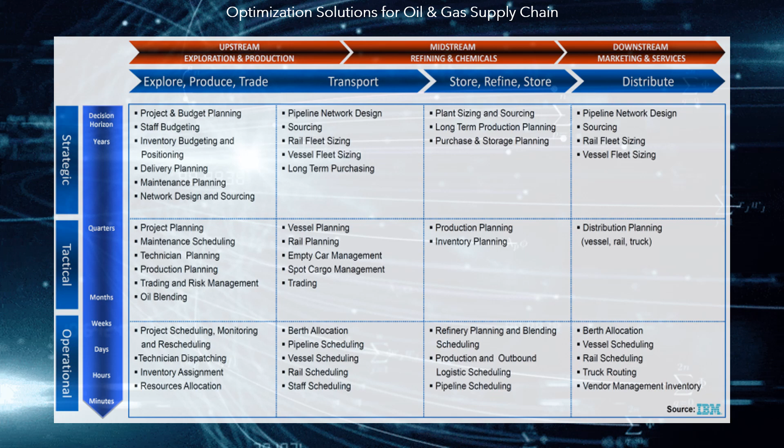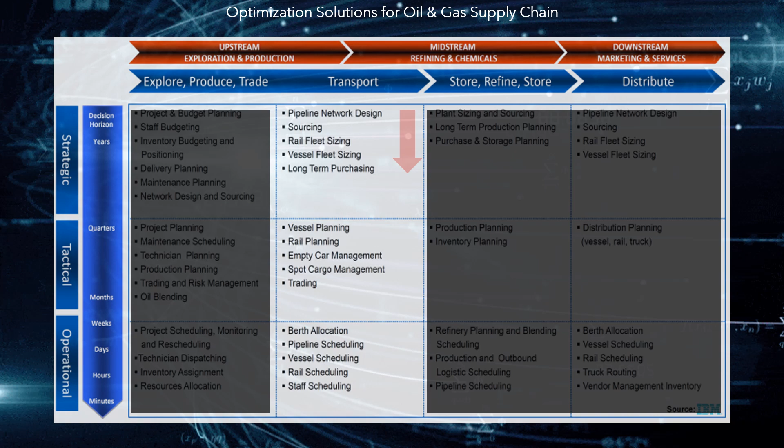Oil Supply Chain Optimization: the oil and gas supply chain is made up of 4 links: upstream, midstream, downstream and retail. The links are connected by multimodal transport networks. The table, elaborated by IBM, shows a resume of the optimization solutions for oil and gas enterprises. Optimization solutions in the transport chain of petroleum products can be classified by their hierarchy: strategic, tactical, and operating. Several of these applications will be discussed below.

Oil Enterprise-Wide Optimization integrates mathematical models for each of the links in the oil supply chain, in such a way to manage the planning of the supply chain with a holistic vision. The design of HAI-OIL-EWO was the result of work done for a multi-business oil company. The union of models, and their coordination, forms the hypothalamus of an oil enterprise.

The current computational power allows detailed modeling of the supply chain, considering individually all the systems that compose it. This allows visualization of all the existing bottlenecks that affect the maximization of economic gains. All models developed by HAI to support decisions in the oil industry are interconnected through an information system. In this way, the construction of the artificial hypothalamus is a question of joining the equations that make up the different models.

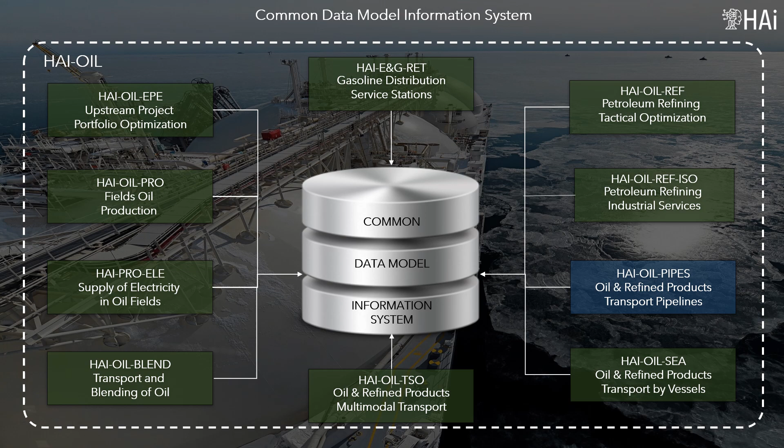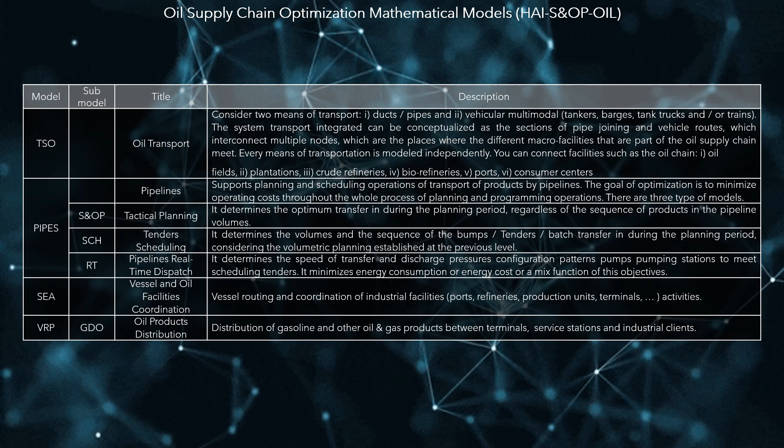Oil Transport Systems Optimization corresponds to a general model, common to all types of oil products: raw, refined, natural gas and biomass, which represents the process for a specific system, including particular equations when required. It considers 2 types of transport modes: pipes and multimodal vehicles, like vessels, barges, train tanks, and/or truck tanks. The table presents a summary of the mathematical models developed by HAI for oil and gas transport optimization.

Pipelines planning and scheduling: the problem of optimization of pipelines involves safe, reliable and economical operation, in which, for each moment of the planning period, the flows, pressures and configurations of the pumping stations must be determined, according to the different types of products that must be transported through the pipeline network.

The goal of the operation moves between 2 criteria: minimize energy consumption, an environmental criterion important to preserve the sustainability of the planet; and minimize the cost of energy, an economic criterion important in energy markets where rates change throughout the day. On the other hand, the technical operating conditions, hydraulic conditions along the pipelines and at the pumping stations, must be respected regarding the flow of multiple, different products that must flow through a network of pipelines that involves the synchronization of multiple sections connecting several production fields, refineries, and ports.

The planning and scheduling of transport operations of products through pipelines, oil and refined products pipelines, aqueducts, gas ducts, and mineral pipelines, is done using 3 coordinated models.

Sales and Operations Planning, S&OP, determines the total optimal volumes transferred during the planning periods, regardless of the sequence of products in the pipeline. Scheduling Operations, SCH, determines the volumes and the sequence of batches to transfer during the planning period, whereas the volumetric planning is established in the previous model.

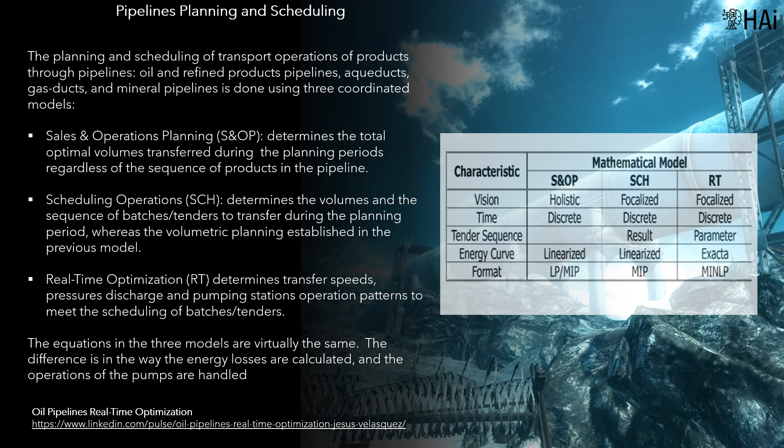Real-Time Optimization, RT, determines transfer speeds, discharge pressures, and pumping station operation patterns, to meet the scheduling of tenders. The equations in the 3 models are virtually the same. The difference is in the way the energy losses are calculated, and the operations of the pumps are handled.

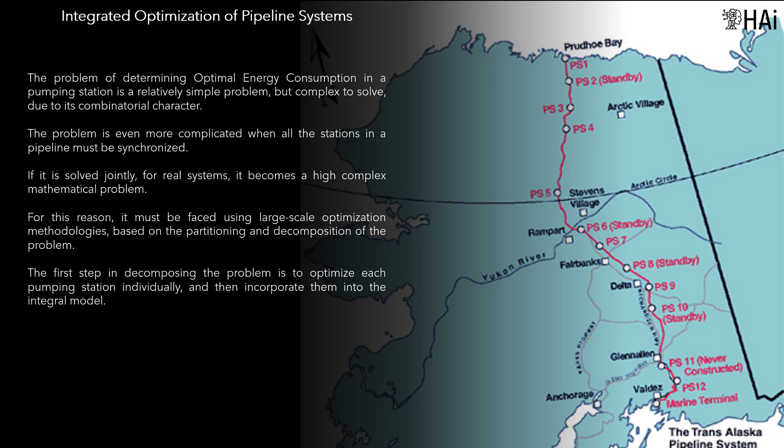The integrated optimization of pipeline systems requires that all the pumping stations be considered jointly. For real systems, it becomes a highly complex mathematical problem. For this reason, it must be faced using large-scale optimization methodologies, based on the partitioning and decomposition of the problem. The transportation system has two fundamental components: the pipeline system and the pumping stations.

The real-time models include non-linear modeling that determines the amount of energy consumed based on the flow of products in the system. In aggregated models, when multiple types of products can be transported in the pipeline, the total transport time must be divided into the time used to transport each type of product at different transfer rates.

To represent the flow of energy through the transport system, the following constraints should be considered: energy conservation in the ducts and nodes of the system; minimum pressure limits, or compression, at the outlet of the ducts, and maximum pressure, or compression, at the input to the ducts, depending on the type of connection between the operational area, node, and the duct.

In the real-time model, a detailed hydraulic system is available in the pump operation model, for each type of pump in the pumping system, and each link in the pipeline, for each type of product, or crude. This ensures the feasibility of the results.

Drag reduction is a physical phenomenon that causes friction to be reduced, and fluid flow to be increased. Chemicals that reduce drag are known as drag-reducing agents, DRA. Several polymeric compounds can reduce the wall shear stress of flowing liquids at low concentrations.

Thus, the use of DRA has the following advantages: increased pipeline capacity and throughput; savings in pumping power; pressure reduction with associated reductions in pipe thickness and pressure surge; and reduction in pipe diameter in the design phase, as well as the number or size of pumping facilities.

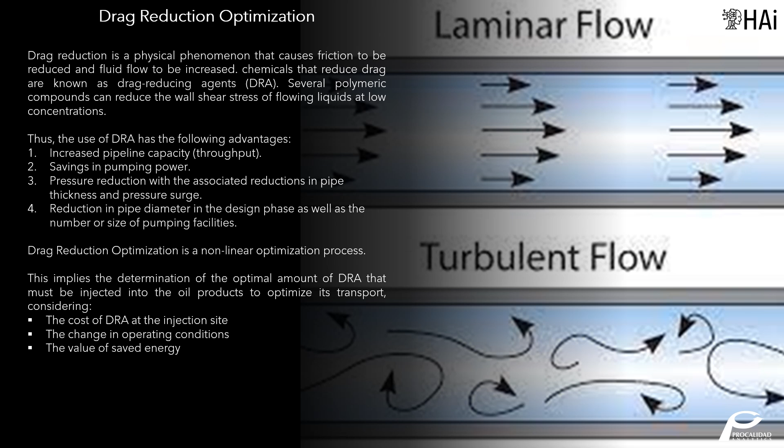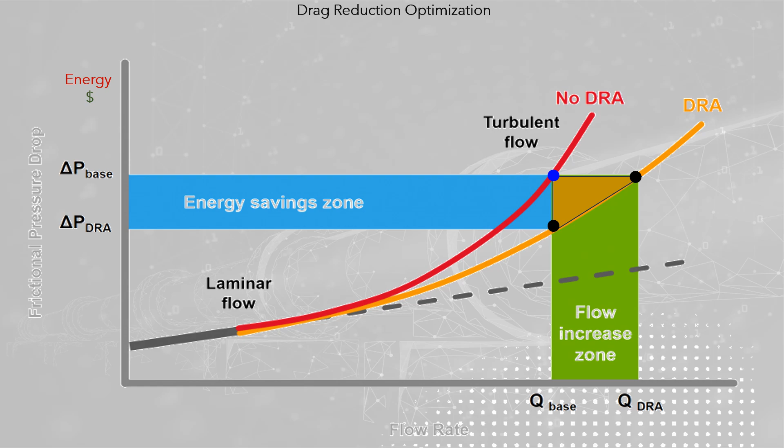Financial planning in oil transportation. The objective of financial planning is to simulate the assets and liabilities management, considering the results provided by sales and operations models. It is a modeling consolidated methodology that focuses on the financial modeling of companies.

The minimum financial modeling should be oriented to evaluate the NPV for a pre-established ROI, return of investments. It will provide the financial statements: balance sheet of assets, liabilities and equity, income statement, profit and loss after tax, royalties and other contributions, and cash flow.

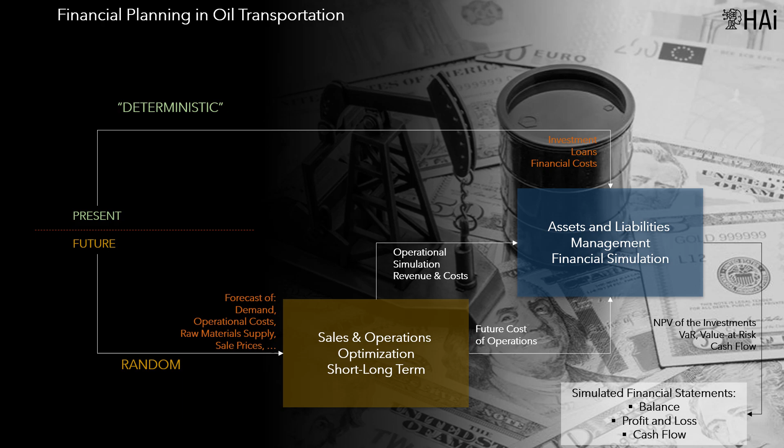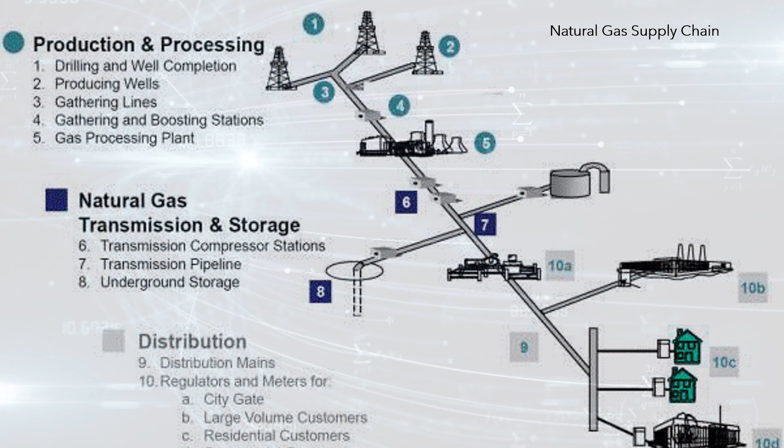Natural gas supply chain optimization. Similarly, like oil, natural gas supply chain may be modeled as an optimization mathematical model to simulate the transportation and storage of natural gas. The diagram presents the natural gas supply chain.

The main features are: natural gas is produced in gas wells, or as an associated product in oil and gas wells. The marketing of gas implies that it can be transported massively by means of gas pipelines, or in ships. For this it is required to turn it into liquid in liquefaction plants, and later converted back into gas in regasification plants. This usually happens at terminals in port.

Transportation through pipelines requires gas compression stations. Finally, the gas is delivered to a market, usually segmented into industrial, vehicular, residential and commercial, and thermoelectric plants.

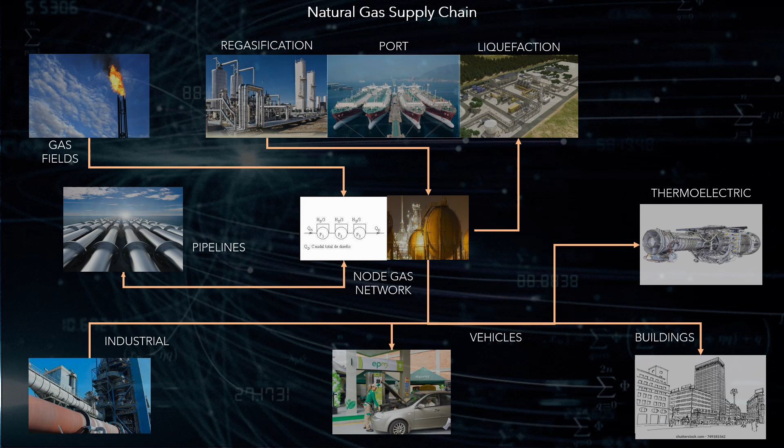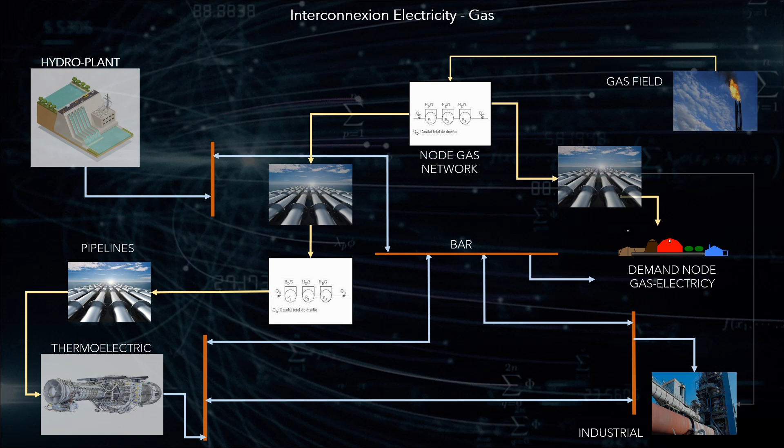As integrated products, electricity and gas must be modeled together. As a basic energy, the natural gas is a raw material of electricity, and in turn, as useful energy, it is competition of electricity. The optimization model includes the following types of nodes.

Production fields. Consumption centers, natural gas demand nodes discriminated by demand sector, among which are industrial, vehicular, electricity generation, commercial, and residential; and ports and terminals that can receive and/or send LNG. It is associated with liquefaction and/or regasification plants.

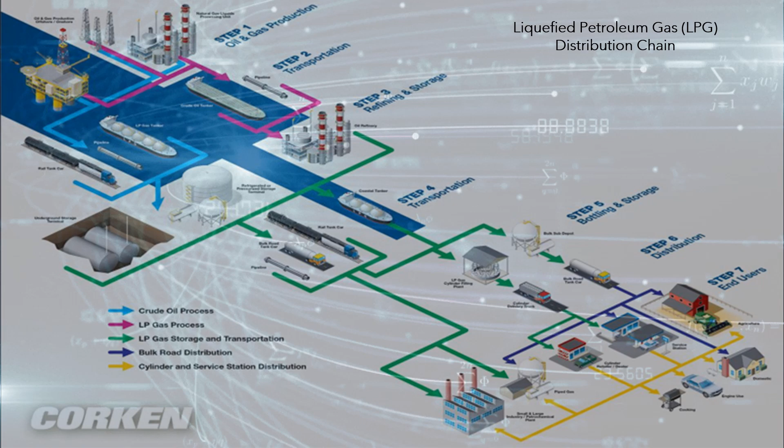Similarly, like oil and LNG, liquefied petroleum gas, LPG, distribution chain may be modeled as an optimization mathematical model. LPG distribution chain optimization: mathematical models for distribution planning and propane gas container gathering, aimed at supporting the weekly and daily programming and operational rescheduling of truck dispatch.

The modeling hypotheses are as follows. Fleet of vehicles consisting of multiple type of trucks and multiple type of LPG trailers. Trucks can be moved with or without trailers. A truck can tow some type of LPG trailer. LPG trailers can be dispatched with or without charge.

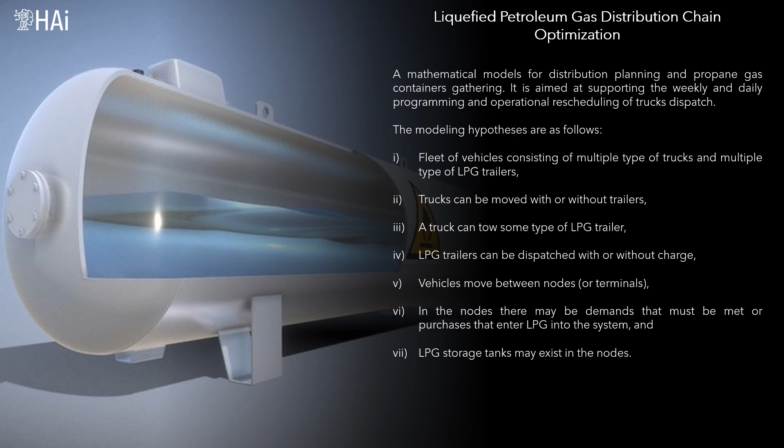Vehicles move between nodes, or terminals. In the nodes there may be demands that must be met, or purchases that enter LPG into the system, and LPG storage tanks may exist in the nodes. The optimization model includes the following types of nodes.

Success case: China National Petroleum Corporation. The paper 'Operations Research Enables Better Planning of Natural Gas' presents the use of mathematical optimization models for pipeline planning.

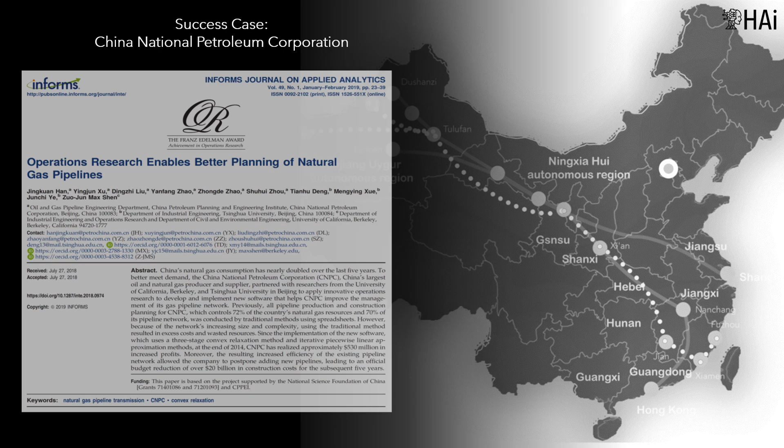China's natural gas consumption has nearly doubled in the past 5 years. To better meet demand, the China National Petroleum Corporation, CNPC, China's largest producer and supplier of oil and natural gas, partnered with researchers from the University of California in Berkeley and Tsinghua University in Beijing to apply operations research to develop and implement new software to help CNPC improve the management of its pipeline network.

Previously, all pipeline production and construction planning for CNPC, which controls 72% of the country's natural gas resources and 70% of its pipeline network, was done by traditional methods using spreadsheets. However, due to the increasing size and complexity of the network, the use of the traditional method resulted in excessive costs and wasted resources.

Since implementing the new software, which uses a 3-stage convex relaxation method and iterative piecewise linear approximation methods, in late 2014, CNPC has obtained approximately $530 million in increased earnings from 2015 to 2017. In addition, the resulting increase in the efficiency of the existing pipeline network allowed the company to postpone the addition of new pipes, leading to an official budget reduction of more than $20 billion in construction costs for the following 5 years.

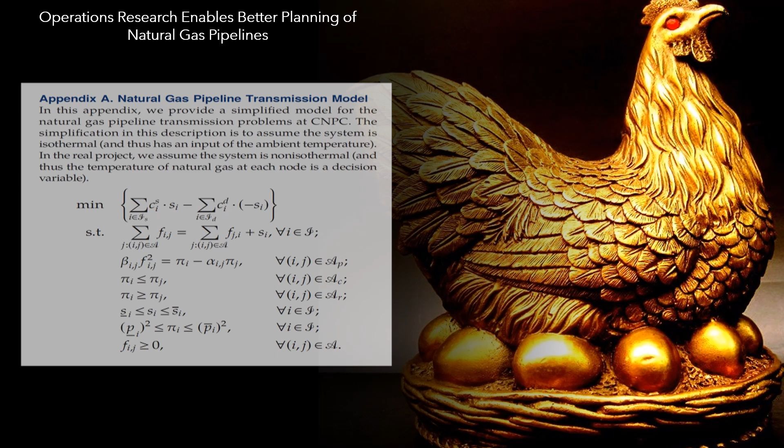The image presents the algebraic formulation of the natural gas pipeline transmission model. Without fear of being wrong, it can be said that mathematical optimization models are the goose that lays the golden eggs of China National Petroleum Corporation.

Like Herbert Simon, Hypothalamus Artificial Intelligence believes that computer-based mathematical modeling is the greatest invention of all times. Thank you for your attention.